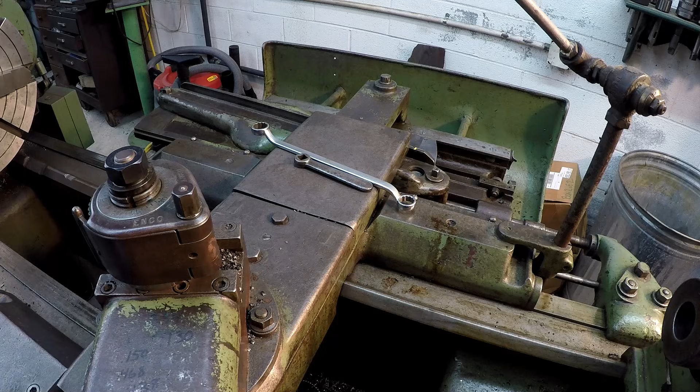I'm working on the taper attachment of the Monarch, getting it set up to cut a 3 inches per foot taper - that's what it is, 3 inches per foot. Getting it set up and tweaked in. I think I've got it where I want it now, and I'm just showing you my setup to verify the movement.

I'll take you over there and show you the badge again, or the plate that's engraved with the angle and the taper per foot. It's got a magnifying glass there that you can look through to line it up like it's supposed to be. Over here on the carriage operating side, I've got a couple indicators set up, and we're going to move this thing down to see if your cross slide is moving the proper amount.

So it's a 3 inch per foot taper that we've got to cut, and that actually equates to a quarter inch per inch of travel. So that should be per side, or if you go per side, that's going to be 1/8 or 0.125 inches for every 1 inch of travel. So that's what I'm setting up.

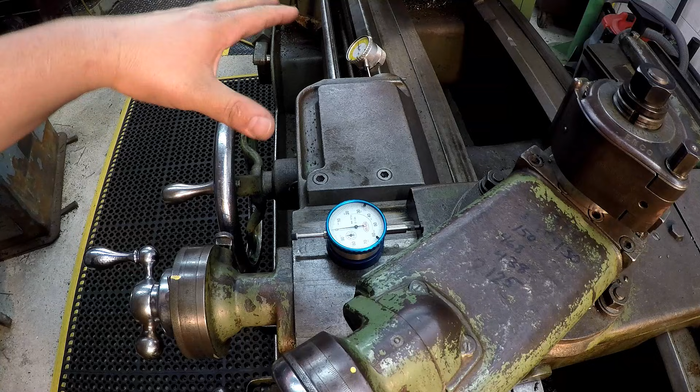So over here we've got our indicators set up. I've got this one on 0. I've already got the backlash eliminated from the screw, we got it in our forward moving direction. We got it 0 here, we got it 0 there. So this indicator should clock 0.125 whenever I hit 1 inch travel on this indicator.

So we're going to go ahead and do that, and I'll just kind of count it out as I go. Got both of them lined up dead on 0. 1, 2, 3, 4, 5, 6, 7, 8, 9. All right, there's exactly 1 inch of travel, and we have moved exactly 125 thousandths on this dial right there.

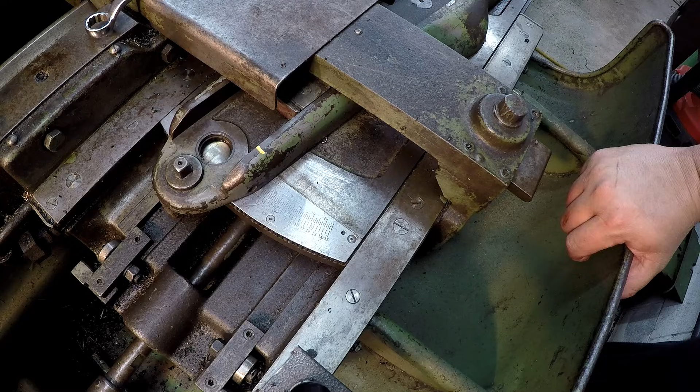Back earlier in the year, I did a job for John Saunders NYC CNC, and I posted those videos on the channel, and we talked about the taper attachment. We cut that tapered shaft, and then I did a follow-up video on how this works. So I'll post a card to that. If you haven't seen that, you might want to check it out.

I kind of explain how this taper attachment works. But this is a really nice taper attachment on these Monarchs. It's got this plate that's bolted down that has the graduations made into it, and then you have this magnifying glass with a line down the center that you can line up on the line. So the first row gives you taper per foot, you can just see the foot word right there. And then the bottom row is degrees, angle.

So I've got it set on 3 inches, and the angle for that is 7 degrees and 15 minutes, I believe, and it looks like that's where the line is. There's not a graduation for the 15, but it's just past the 7. I know you can't see that on the GoPro. This magnifying glass is a little bit dirty underneath it, and I have a really hard time trying to get that thing clean.

It needs to be removed, so you'd have to take this whole thing off to clean that. There's my attempt to try to get you a better shot of it. Lined up on the 3, the 3 is next to the main line there. So it should be 3 inches per foot of taper.

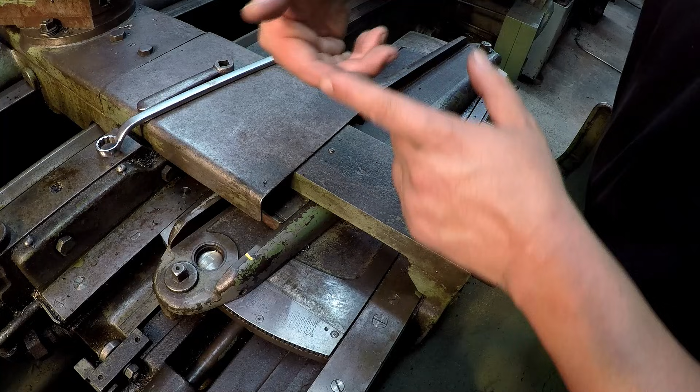Just to kind of quickly summarize, how this works is your cross feed screw through the cross slide here is attached to this block. This block runs through the channel, so as in telescoping, that's how it can move. On this other end, the lead screw is telescoping. So as you crank the carriage down, this block here is gonna follow this channel, and it's gonna move your cross slide in or out, whichever direction you're going. So that's how that works. Kind of the quick overview anyway.

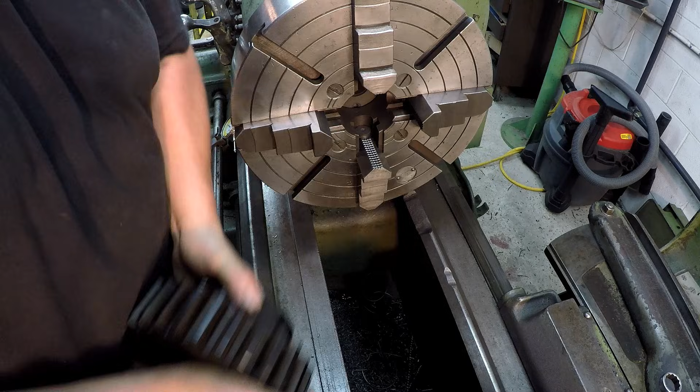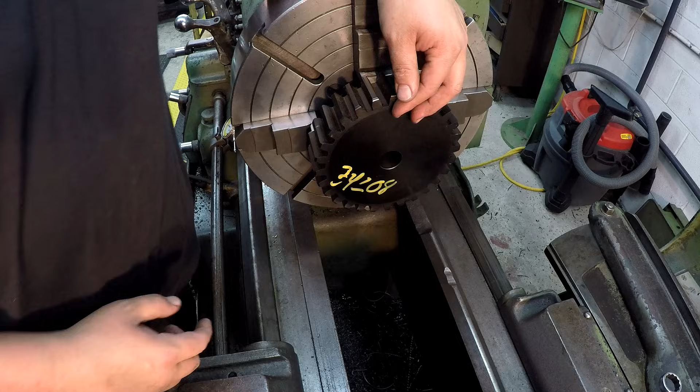I got the 4-jaw adjusted. Here's our gear that we're going to be chucking up. We're going to chuck the hub side here. Now we'll point out there's kind of a small radius in this corner right here, and these jaws are pretty square to the end, so I'm not going to be able to push it all the way up against there and chuck it, because it's going to try to push out on that radius a little bit. So I'm just going to have to come off of it a little bit. We won't worry about squaring it up directly against the face of the jaws.

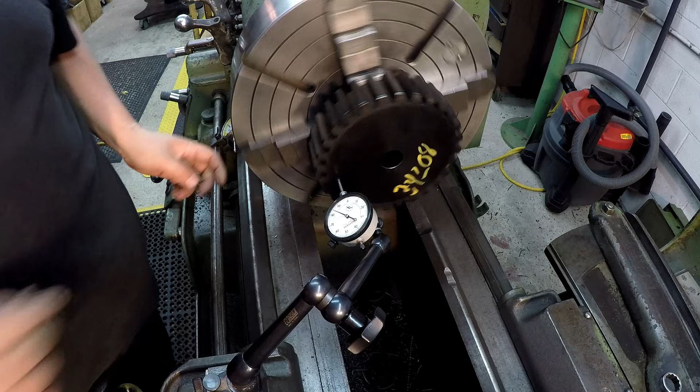All right, you see we got some run out there. What we'll do is go ahead and make sure our face is running square. And you can see there we're running out a little bit, so we'll go ahead and bump that. We'll bump that around.

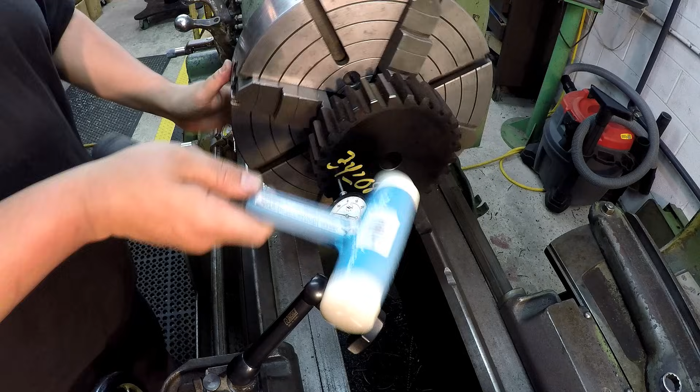All right, that's 1 thou. Alright, we got her pretty close there.

So what we'll do is, this hole should be machine true, it should all be concentric. So we'll indicate this hole right there. I'm going to go get my hole, the ID indicating attachment, and we'll be right back.

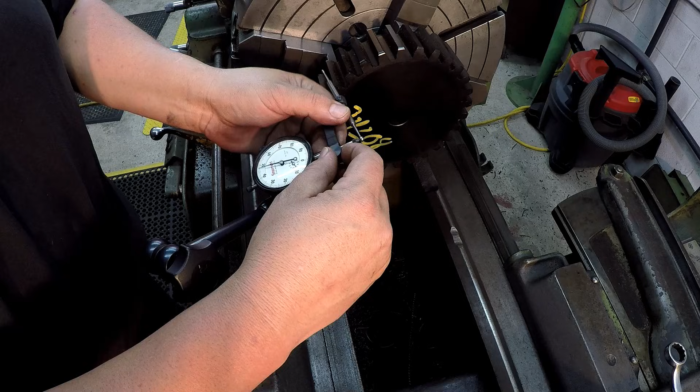So I've shown this several times throughout the years in my videos. This is a Starrett number 670, and it's an ID hole attachment that goes on here. It's very quick and easy and handy for indicating the inside of a hole. You can also use it to get in behind something if you need to.

But I was going to point out, I have one more here. This is the Brown and Sharpe. It's the same thing, it's a hole attachment. Basically the same thing as a Starrett. The only difference is the little finger screw is on the opposite side, and they milled a flat here where the indicator touches it, but it's the same thing.

Every now and then I use that one. Both of them work excellent.

Stick it in the bore and give it a little preload. Try to get it centered up, you know, the needle there.

So after I get this about 1/8 of an inch out, like I always show, I just do a little at a time. I'm in no big hurry. And what we're going to do is loosen the highs and tighten up the lows.

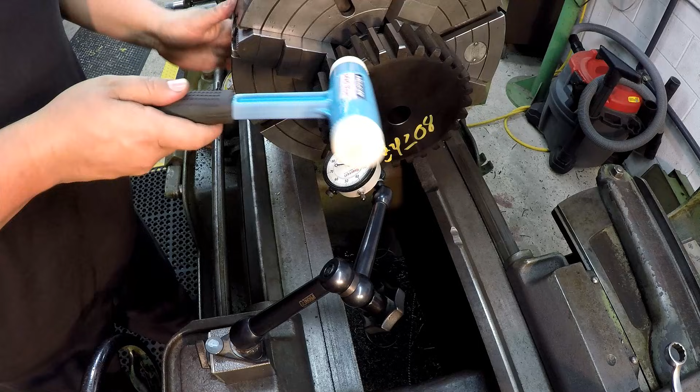What do you think? Good enough?

All right, and we're going to go back to the bore.

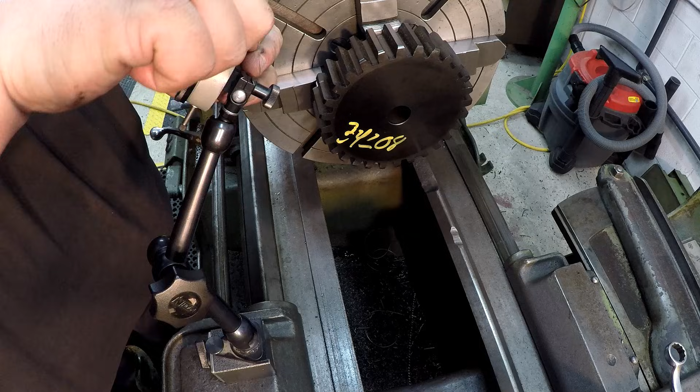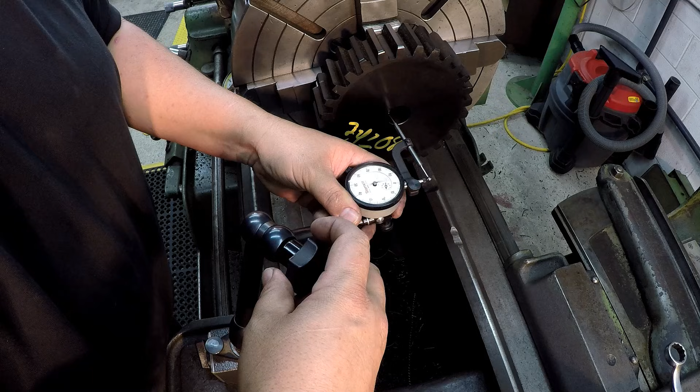Yes, it would be easier to have 2 indicators, but I only have 1 dial indicator set up on the Noga. The other Nogas I have set up with like a test indicator. So I just, like I said before, I like using the dial. I should have 2 of them. I don't.

I'm going to tighten that low. It's only a few thousandths, so you can usually get it to move that little bit by just snugging the low. Or if you're on the OD, it would be the high.

All right, we're within a thou. Tenths. All right, so we're going to leave it at that.

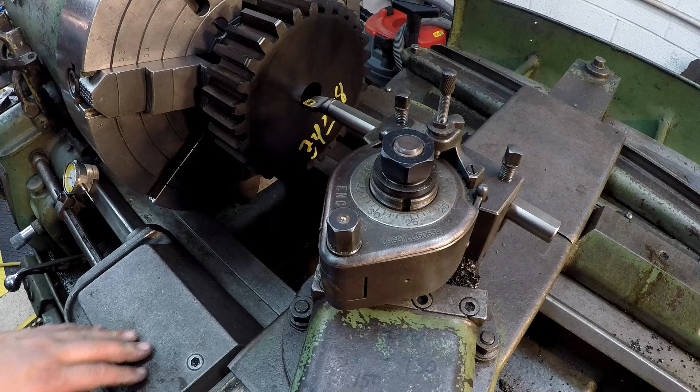I'm going to go back to the face. I'm going to check it. I'm going to make sure that both the face and the bore are running true before we carry on with the machining. We got the gear running nice and true. I've got a bar set up on center. We're ready to touch off and start making our cuts.

I haven't ever used this bar before. That's one I picked up at Moultrie last year. Looks like it takes a CCMT type of insert. We'll see how it does.

I got a 1/4 inch of clearance, and actually looking at it now, I think I'm going to have to move this tool post down some. I failed to look down here, the side of the compound is sticking out further than the side of the tool block right here. So I need to loosen this nut and slide this thing over so that this is sticking out further than the compound. All right, we got this reset now.

Just loosened that, slid it down, squared it up against the face of the gear, and we are ready to go.

I'm using the compound to... I'm going to touch the tool. All right, there we go. I'm going to run this back. Let's go 100 thou.

Oh, that's doing pretty nice, man. I was expecting a little chatter, actually.

All right, so we run it back, then we crank our cross slide back. I'll show you that here in just a minute, and then go back in. If you run it in and then feed back, then you're going to be eliminating your backlash while you're trying to make the cut.

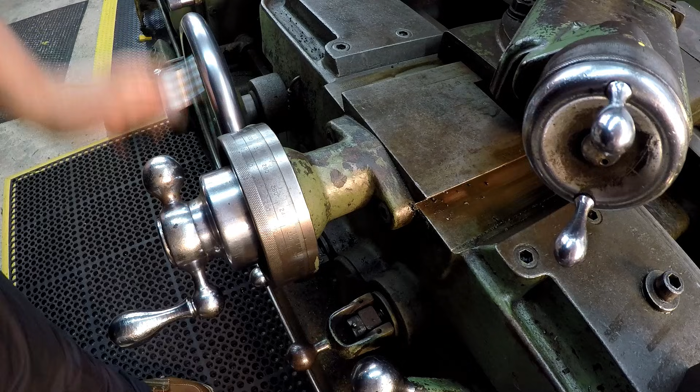Crank it back. That was our second cut, so now we're going to do one more. I'm just taking 100 thou on the dial, and then we go back in.

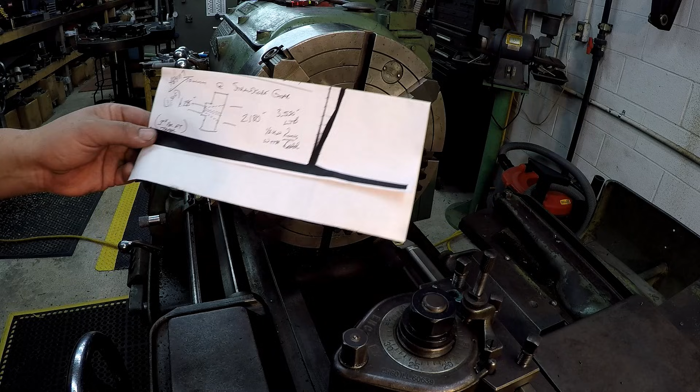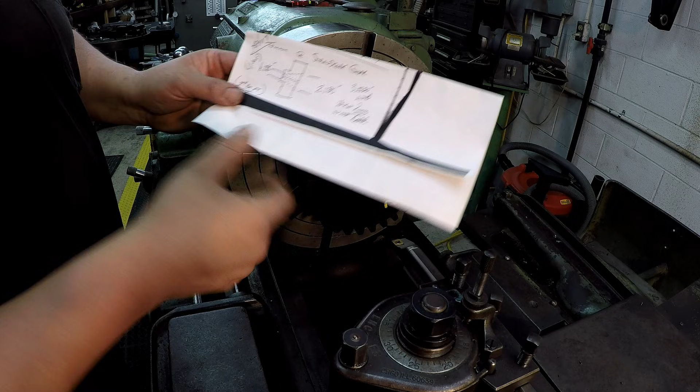Before I go any further, I figured we'd talk about some numbers on where we're going to be boring this to. I got a drawing here, a hand sketch. We have our knowns: a 3 inch per foot taper, that's our main dimension, and we're going to work off the large diameter. They got 2.180 written as the large end, and the small end written down there. We also have a length here, 3.520 length through bore, but that might be on the existing one. We're going to measure this one and make sure it's 3.5.

So we finally get to use our hub mic right here, the Mitutoyo 3 to 4 inch hub mic. This is a perfect job to use this. All right, so I'm getting, that's 3 inches, 503 thousandths is what that is. I'm gonna call that 3.5.

This is a book that I use oftentimes, Machinist Ready Reference, and there's a page in here, rules for figuring tapers, very handy. I wanted to take these notes and compare what I get to what they got down here for the small end. What I got is 1.305 working off of a 3.500 hub length. That's what we're going to consider at 3.5.

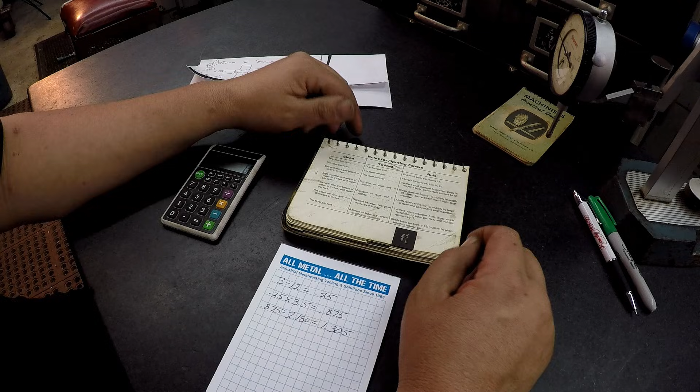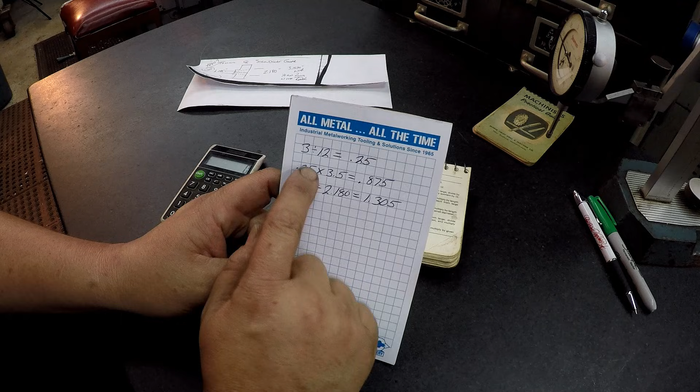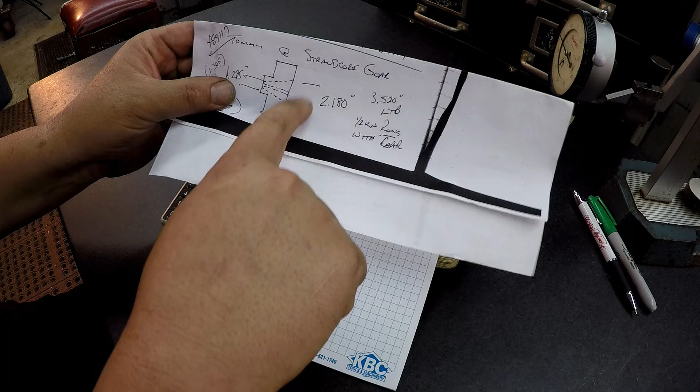Right in here it'll tell you the given large diameter and length of taper and taper per foot. So we know our taper per foot is 3 inches. Divide taper per foot by 12, multiply by length of taper, then subtract the result from the large diameter. So that's what I did right here. 3 divided by 12 gives you a quarter inch. A quarter inch times 3.5 is 0.875. Subtract that from 2.180, which is our large diameter, and that gives you 1.305 on the small end.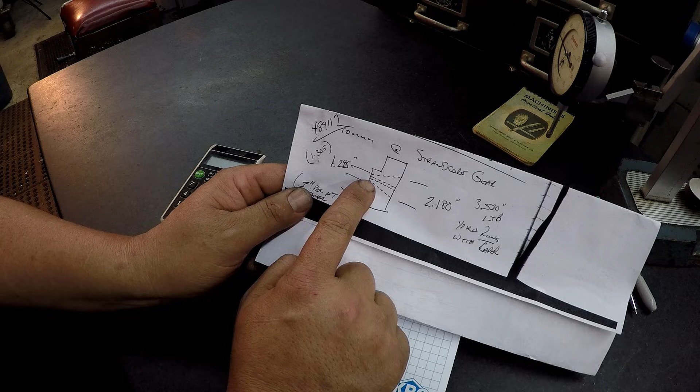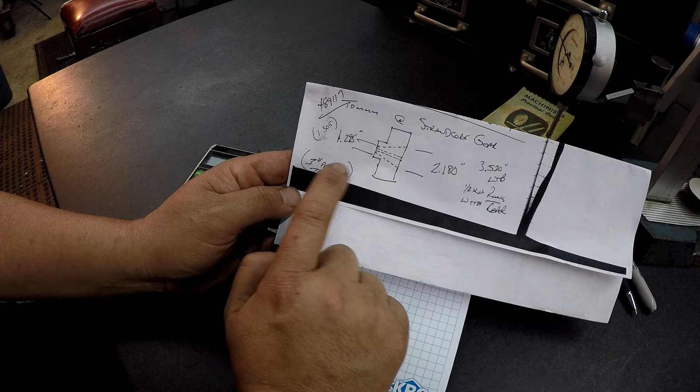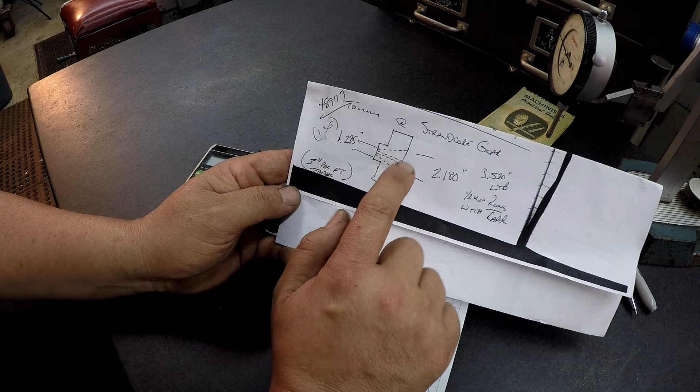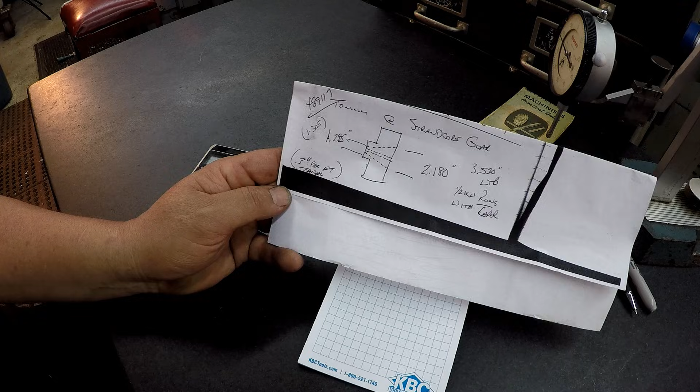So they've got 1.28 written on there, and I imagine somebody was using calipers on an old part, and that's just the measurement they got. If we're on our correct 3 inches per foot taper, this dimension right here is not very critical as long as we hit our large size where it needs to be, right around the 2.180, because if you make this too big or too small, then it's going to make this too big or too small. It's going to fit in a different place on the shaft. So we're just going to try to hit this big end right at 2.180 as close as we can and let her go from there.

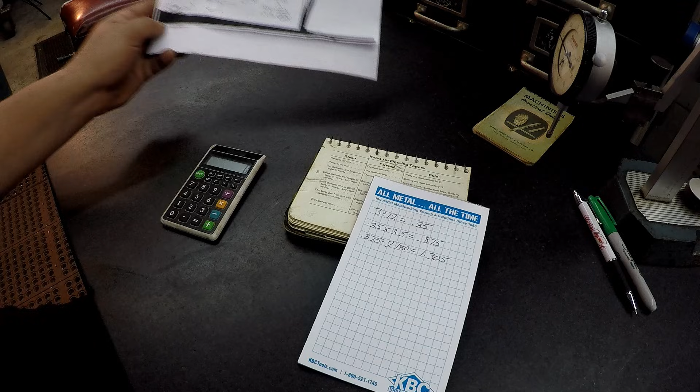And of course we'll try to get a nice surface finish through there, nice and smooth. All right, so I just wanted to point that out. Handy little book that I use sometimes right here. This is another one I go to every now and then, the Old Machinist Practical Guide. It's got some handy info in there every now and then.

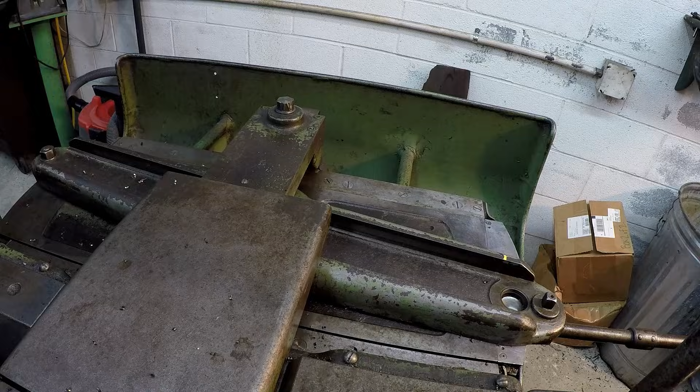Down to about 60 thou that I got to take out of it, so I'm going to back off to 20 thousandths depth of cut. I sped it up to 530 and reduced the feed rate to it's actually 4.5 thousandths. I want to do a test cut to see how this insert's going to do, because this is a new insert for me and it's got a large nose radius on it, so I want to see what kind of finish it'll give.

After that cut, we'll look at it and see how smooth it is. I do have a 1-inch insert bar that I can switch to as well. It takes a different kind of insert.

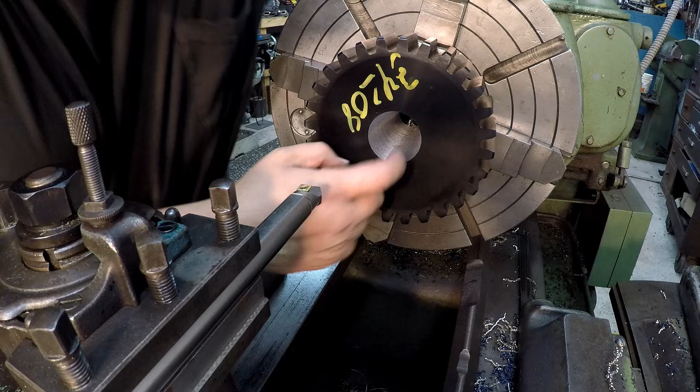That was our first little finish pass through there. It might not look too bad, but it's a little more rough than what I think it should be. I'm going to swap out some tooling and see if I can improve that finish. So I swapped it out to a 1-inch bar. This is a Trigon insert, ones that I use every day. We'll see how it does.

I think I got her dialed in the way I want it. It's got a nice smooth bore there to it. And I just measured it. I'm at 2 inches 150 on the large size right now, so we got 30 thousandths to come out, and I'm going to go for it.

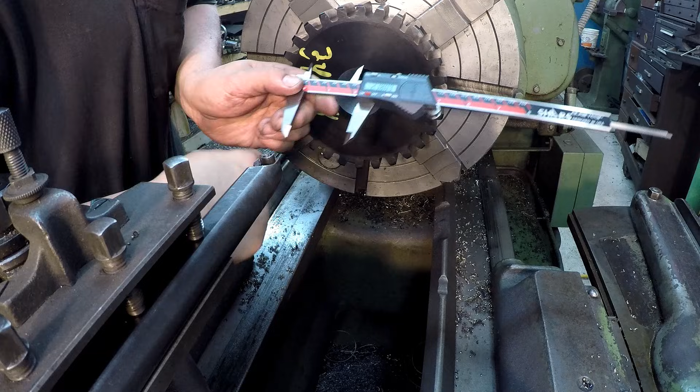Back off so I don't drag any. All right, it looks good. I think I'm right where I want to be. I want to break that edge ever so lightly. I'm going to use this Noga tool to do that.

Just like that. All right, we're gonna hit that bore just lightly, and this quarter inch rod, just a homemade flapper with a little bit of emery wrapped around it. I just want to hit it a little bit, just to try to knock any of that fuzz off the bore in there. Not gonna hit it much, if the paper will cooperate.

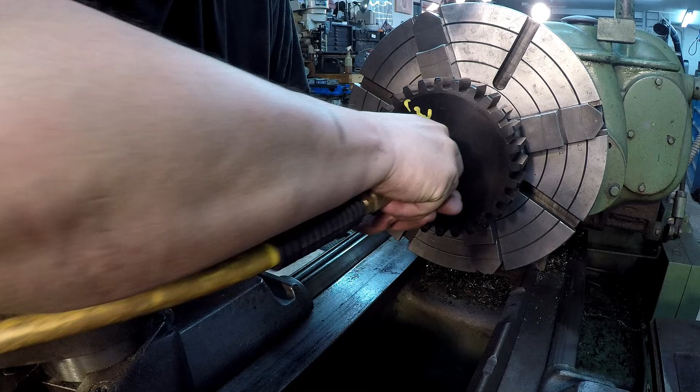Oh yeah. Yep, that's perfect. Just like that.

All right, there's our gear finished up in the lathe. Turned out pretty good. Got a nice smooth bore. We'll go ahead and do a check on this and see about where we finished it at.

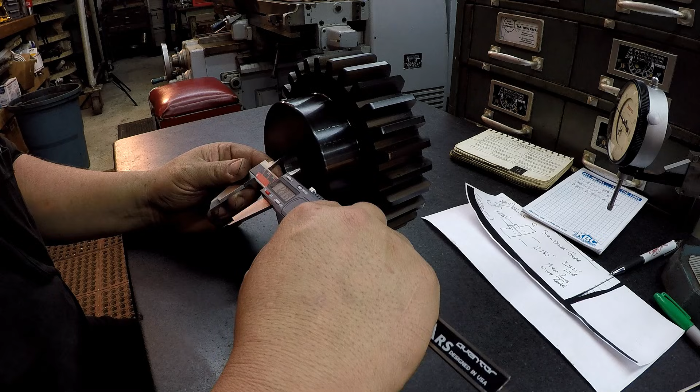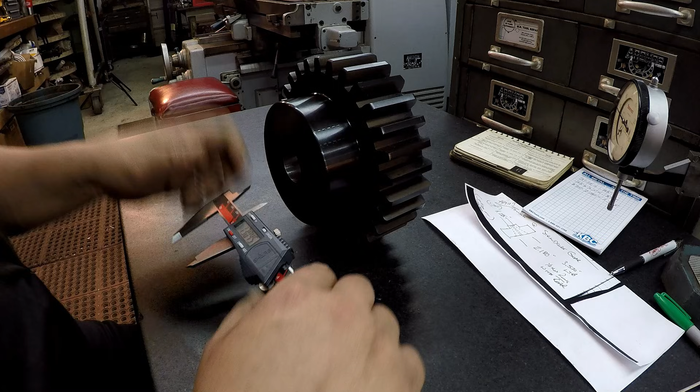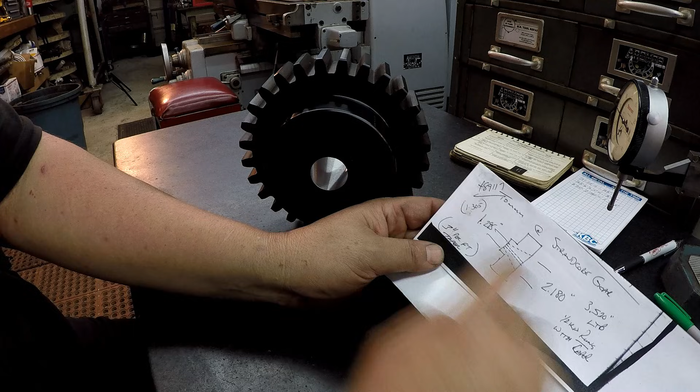I got 307, 307 and a half right there. All right, 307, it's about the biggest I got. I did very lightly try to scrape that edge off there. So I think we hit very close to our mark, our 1.305 on our small diameter right there.

So I actually have 2 of these to do. There's one more that's identical, so no need showing the same thing again. I'm gonna go ahead and do the other one, and then after that I'm gonna make a broach plug for it. So what I'll have to do is take a piece of stock, and we'll have to flip the taper attachment to the other side. So instead of boring a taper, we'll be turning a taper to match this, and use that to make a broach plug for a keyway broach. That'll come up in probably the next episode or so. So hopefully you enjoyed, and we'll see you on the next one.

All right, so I had to break out my orange gloves for this box right here, but we got a really cool viewer mail box that came in, and this is from Bob Alfred. He is from Whitmore, Michigan. So Bob had emailed me after the video at the Stennis Space Center, and during that video I had shown where they had a tile on display off the space shuttle.

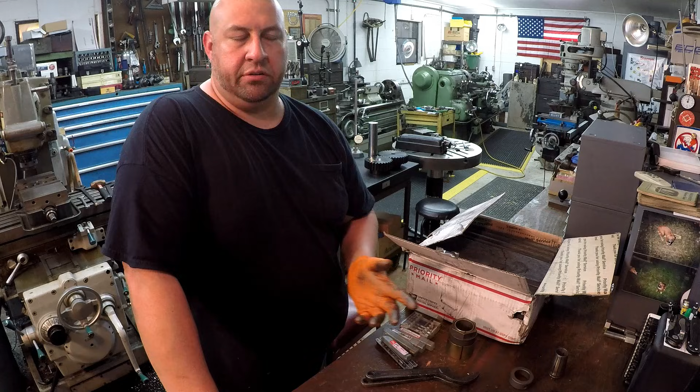And in the video I had mentioned that it would be cool to have one of those to use around the shop, but I called it a heat conductor, when in fact it's not a heat conductor. It's that tile is what would be known as a heat insulator, as Bob corrected me, which he's right about that. I called it out wrong, but he had emailed me and said that he had some of these tiles that he would send me if I needed some.

So what these are, I've got his email pulled up right here. This is graphite foam board with a graphite foil face, and they're used in a hot zone of a vacuum furnace, and it's some stuff that he does, I guess, for a living there. He lines those furnaces up with this stuff, but he said that he had some of these that he would send me, so I told him that would be great, and we can use these over on the welding table whenever we have to do some brazing or some soldering, or if we got a part that we need to do some preheat on, or if you got, say we got a sleeve that we need to shrink onto a shaft, you can set your parts on something like this and do your heat.

And this type of material insulates the heat from being drawn through into like the table, where if you just set it on another metal table, that's drawing the heat out of your part. So this stuff right here hopefully will work pretty good. I've always used fire brick. That's what Dad always had, was fire brick. Still got them under the table, and that's what I've always used. But these could be very handy for many things. So we'll find out, I'd like to put them to the test and see how they do.

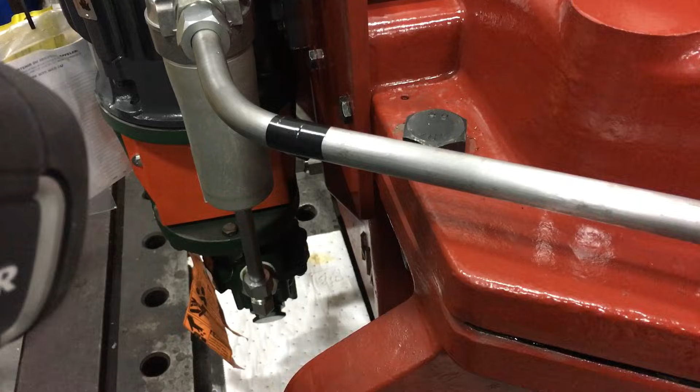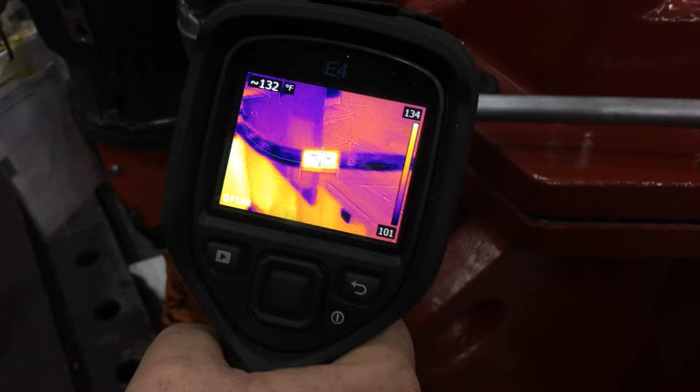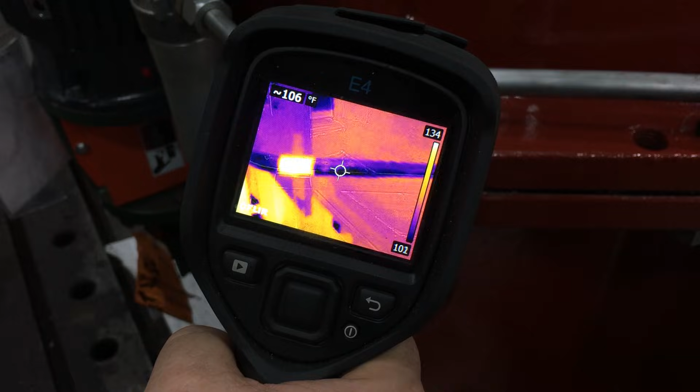All right, shiny tube, and then you got electrical tape there. What are we doing? That's called emissivity - it's shiny surfaces versus dark surfaces. They confuse these high-tech guns right here. You see the temperature is 132 degrees, and when you slide it over to that shiny surface, it drops down to 106. So basically 20-something degrees difference just from that shiny surface versus the dark surface.

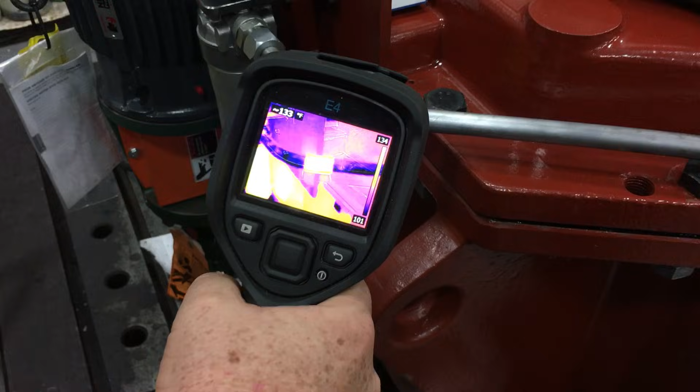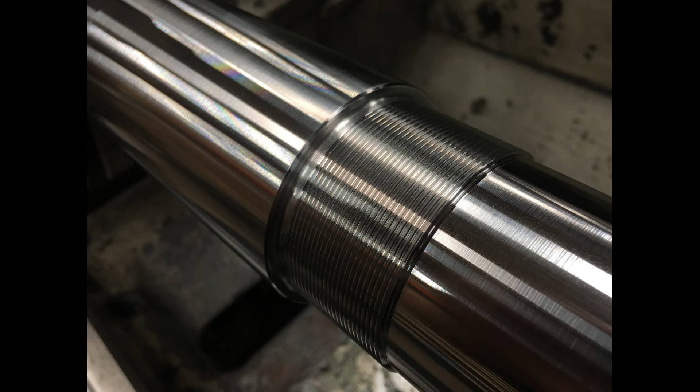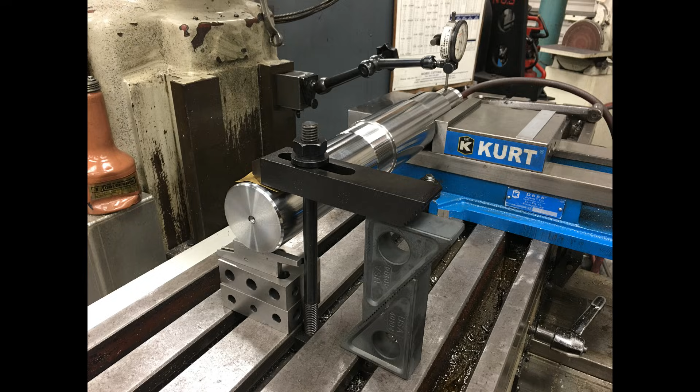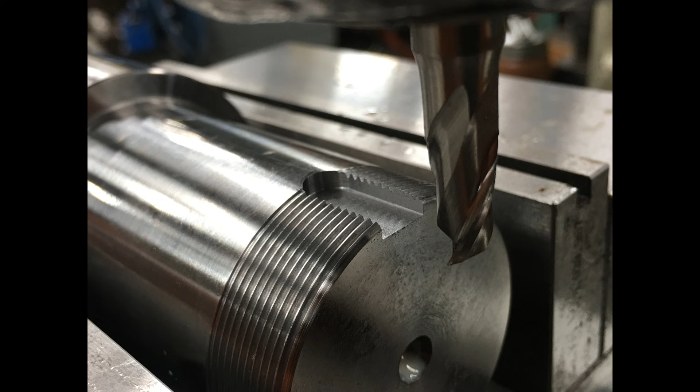This is a gearbox shaft that I recently machined at work, and I'm sharing the pictures with you of the lathe work that I did and it being completed. I've got a couple clips that we're going to share here in just a second. One is showing the total indicated run out before I cut the keyways, and the second video is after I mill the keyways. I had somebody ask me if I check them, because I showed that video on Instagram of checking the TIR, and then I made another video showing the TIR after the keyways were milled into the shaft.

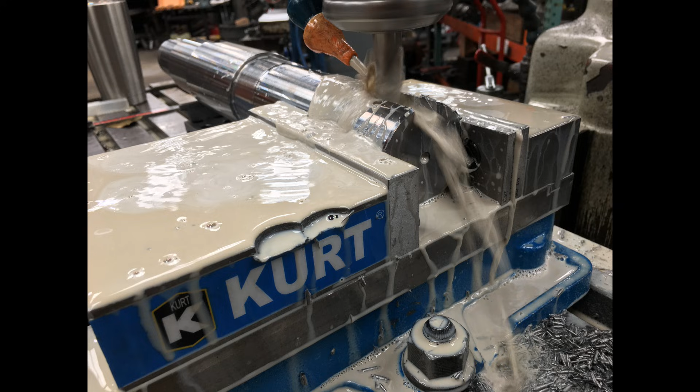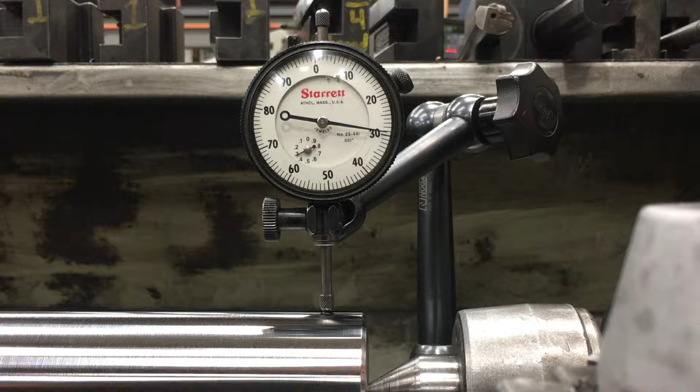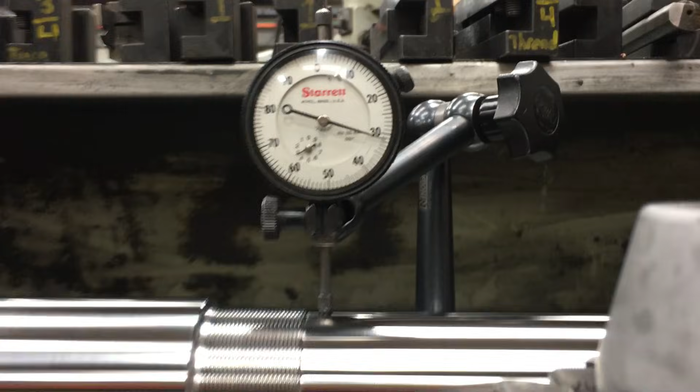So here's our first video, just showing you that the indicator is touching, and this was before I took it out of the machine, getting both ends finished out. You can just barely see that needle moving. It worked out great, and most of these shafts always turn out that way. That is some of that heat treated 4140 - it machines nice, it finishes nice, and it's a great material to make a high strength shaft out of.

So I'll show you all the journals, and all the run out is pretty much identical everywhere I tested at. Some of these spots I won't be able to check again with the indicator because keyways will be there, but we'll show you here on our next video.

So after milling the keyways, I brought it back to the lathe, but this time I set it up between centers, and we're going to do the same test. Now you can see a little bit of wiggle on that indicator, not much - we got maybe a 0.0005 in some places there. So it's looking pretty good, right? Sometimes milling a keyway can make that shaft move a little bit, but I found that in most cases with this 4140, it never gives me a problem.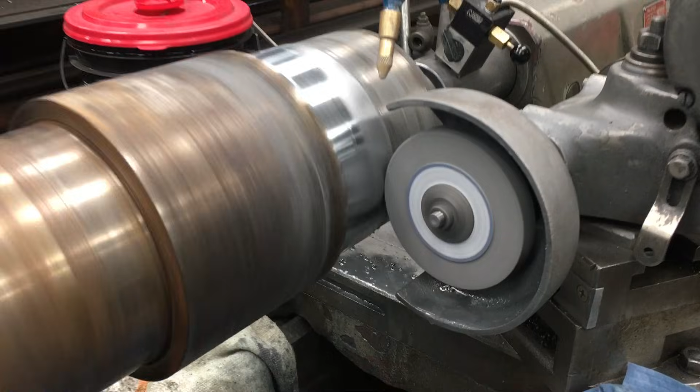One final clip for you this week is another shaft that I had to do some tool post grinding on. That's a bearing journal that was worn down. We sent it out and had it hard chrome plated, so it built up with chrome. I set my tool post grinder up, and I'm grinding it back to size. I know I've got a lot of requests to show this on my channel, so I hope I can bring you a good video in the future of showing the tool post grinder in action.